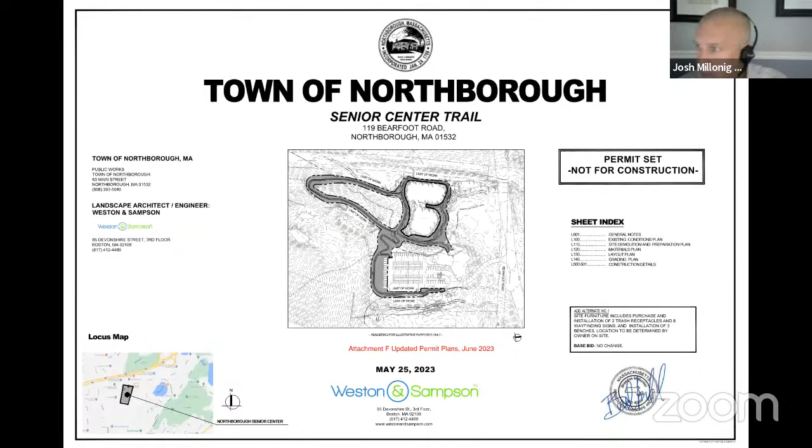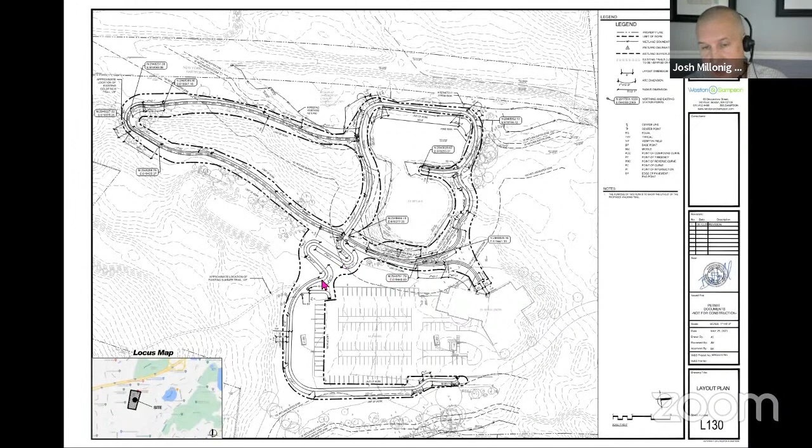This is just our dimensioning plan. A little bit hard to read, but it is a 6 foot wide pathway, and these are all the dimensions that are around there.

The areas of disturbance where we're removing any forest canopy or existing vegetation will be reseeded with a conservation seed mix. Right now, we're looking at a New England wetland plants restoration seed mix. So all disturbed areas will be reseeded and revegetated, and where they're far enough off the pathway, they'll be allowed to naturalize back into typical forest communities.

There'll be a little bit of maintenance that happens along the extreme edges of the pathway, just to keep the path open from being overgrown with any weeds or anything growing over it.

The last few slides are just details of our erosion control measures that we're proposing on the plan to prevent sedimentation from spilling down into the resource areas. So we have a combination of compost filter tubes and jute matting where slopes are steeper than 3 to 1.

We do have a construction entrance, which we're keeping on the existing parking lot area, so machinery and vehicles will be entering from there. Any material storage is also going to be in that same area off of the parking lot. All of these will have erosion control measures around the staging areas. We also have sediment fence and filter fabric with wattles to help with erosion control.

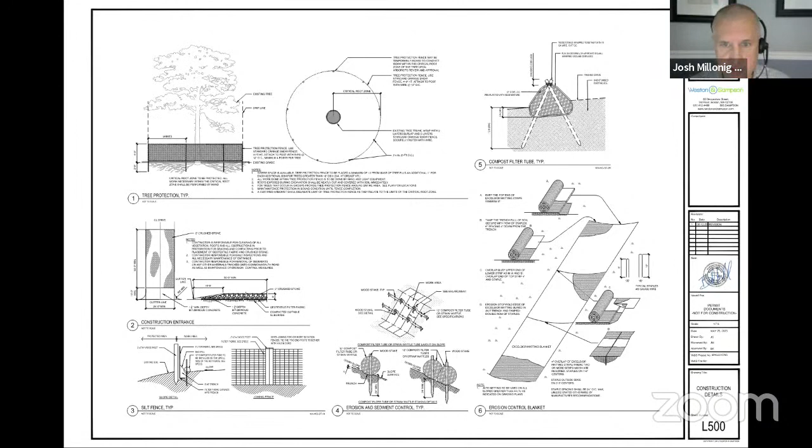The next few slides are just typical details of a small unit block retaining wall to retain slopes where needed, and then typical pavement details. We do have a couple areas of seating, so we'll have a small concrete pad to allow the installation of seating benches along the pathway there.

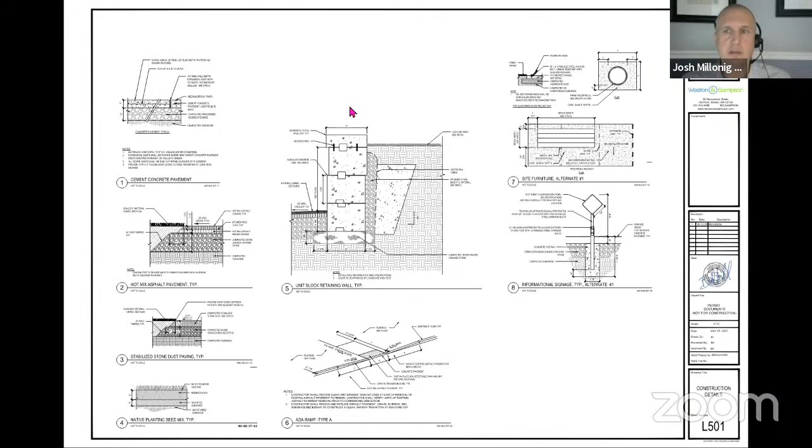Can I jump in and talk about wetland resource areas a little bit, Josh? Great, yes please. Jeanette, if you just want to stay on one of these slides, I can talk to it. You can all hear me all right, right?

I'm Megan Kearns, a wetland scientist with Weston and Sampson, for the record. The proposed work is located within the 100-foot buffer zone to BVW and bank. The bank is a pond bank, which is where the trail mostly goes around, right there in the center of the site.

Technically it's to the west, but it's on top of the page because it's turned a little bit. We've got 2 BVWs north of that and an intermittent stream that runs along the site and goes underneath an existing railroad, a raised bed next to it, and off-site. So all of the work is proposed in the buffer zone, the 100-foot buffer zone, as well as the local 25-foot and 35-foot buffer zones under the Northborough Wetlands Protection Bylaw.

The proposed sidewalk will be in the 35-foot buffer zone, and there will be some grading and vegetation removal in the 25-foot buffer zone. The applicant is requesting a waiver for this work in the 25 and 35-foot buffer zones, as the project does not meet all the performance standards outlined in the Northborough Wetland Bylaw, but it does provide public benefit.

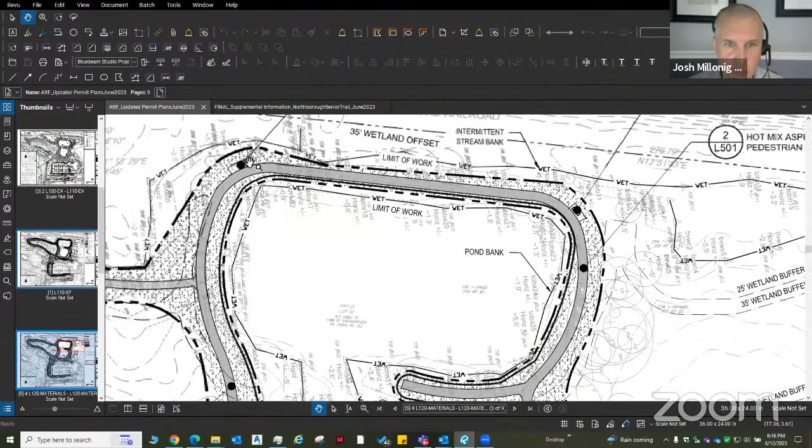Zooming in, there we go. So they're on the far upper left and right bends, more towards the railroad tracks on top of the page. And then there's another one over there next to the existing parking lot. I believe there's just 3 benches, Jeanette, if I'm not mistaken, proposed. That's correct - there's 3 benches proposed.

The Parks and Rec Commission has a donor bench program that's available as well for any future seating areas if they're desired.

So you need some waivers here. Now, we walked the site last week, and we'd walked the site a couple of times previously when we had a previous discussion about a potential Frisbee golf situation in the area. So we're a little bit familiar with the site.

My main concerns are twofold. One, handling that runoff from the impervious surface that's going to go down, and secondly, the north end of the pond here. The water comes up to within less than a foot of the walkway. I think that area back there is a concern of mine in terms of degrading that very fragile environment. I have a photo of that area if I can share my screen.

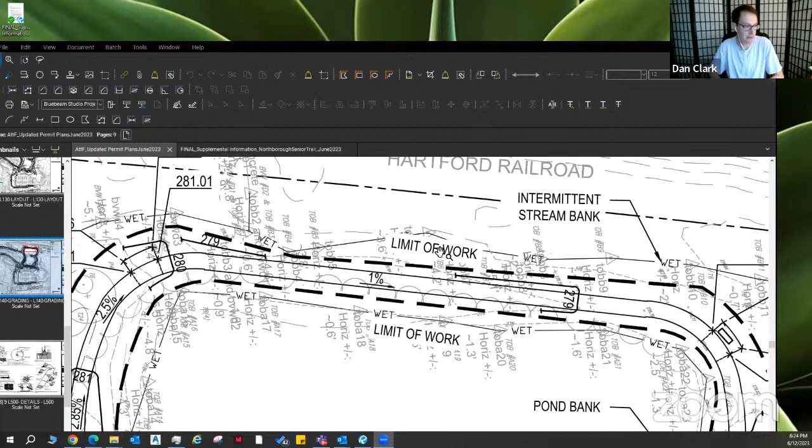Any other commissioners have questions, comments, concerns? I guess I'll go. I have a few questions, but my overarching concern is how much work is being done within those zones, the 25-foot and 35-foot. My concern, I understand it's for the greater public good, but it seems like the town should hold itself to at least the same standard we expect all residents to be held to. We typically are pretty firm on those two setbacks. So I guess I'm not sure how it sounded like the whole project was in at least the 35-foot zone, if not the 25-foot zone. I'm not sure how that settles with me.

Is there any way to just- I've walked that dozens of times. It's actually a very flat, relatively firm path. Is it ADA compliant the way it is? It is not an ADA compliant surface. It needs to be stable underfoot and maintained. There are certain vertical deviations with tolerances that are required.

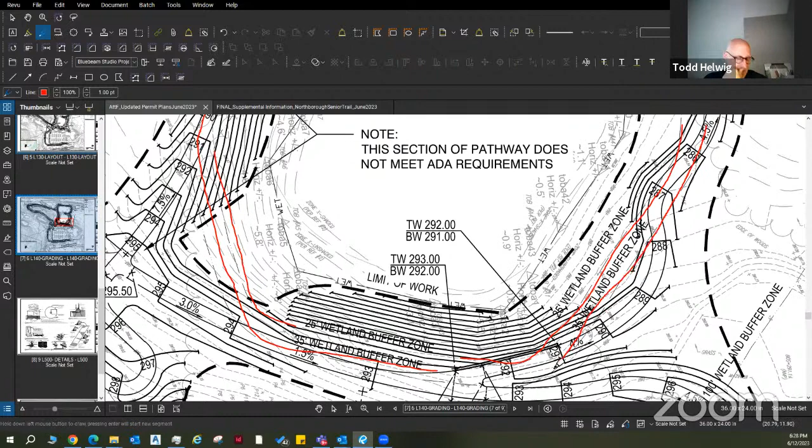If we were allowing a trails committee, just a regular old trail, would we be allowing them to do this? Have we done that recently? My recollection, I can't recall a trail that had this type of... well, we got the stuff down by the Yellick, right? Yeah. Most of it, what's been allowed has been more perpendicular crossings. There have been impacts in the 25 and 35-foot zone, but it's as they're making a crossing as opposed to

moving around it is the idea. And that's what the definition of this project makes it more difficult, because you're not just going through, you're going there to visit. So that's the difference. And that's what the commission can consider when granting the waivers.

I don't know that it's relevant to compare it to our regular trails out on other properties. I think this is site specific, and it's to complement the senior center. And I'm willing to make the waivers for this project so we can go forward. I don't think that we're setting any precedents because we're making an exception for this particular project. And I think we should go forward with it.

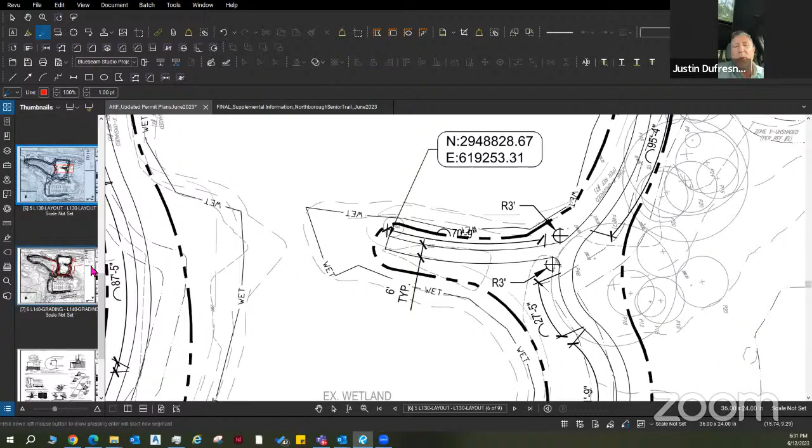Just kind of wondering a couple of things when it comes to impacts. You know, that one sensitive area where we were just looking at in between those two wetlands. Wondering what the minimum width for an ADA path might be, knowing that we're 6 feet there. I mean, could we go to 4 feet through that section just because it is such a tight area, and try to minimize some of the disturbance there? Just kind of a question, I guess, on that front. And then also looking at some of the grading, it seems like we're chasing things down the hill quite a bit towards the wetlands. I mean, is there any way that we could increase a wall by a foot or two and try to limit some of the off grading from the path?

It just looked like in a couple areas we might have a wall already, and maybe we're trying to minimize the height of that wall, but potentially if we extended it a little bit, maybe we could lessen some of the impacts there. And then I guess my third question is just in the routing, there look like maybe a couple areas where if we pulled the routing away from the wetlands a little bit, maybe there's a little bit less disturbance that we could have there. Just kind of thinking of some of those edge conditions, if there's a few ways that we could limit some of the impacts, but still maintain the intent of the design and everything. Just kind of wonder if that's an option.

Yeah, thank you for the questions. Those are great, I'll do my best to answer them in order. So the first one is about the path width. Right now we have a 6 foot wide path. For ADA compliance, you need to provide a turnaround spot for somebody, let's say they're in a wheelchair, of a 60-inch diameter circle, so a 5 foot wide area that you need to be able to turn around. I believe the running widths in between these turnaround zones can be 4 feet wide.

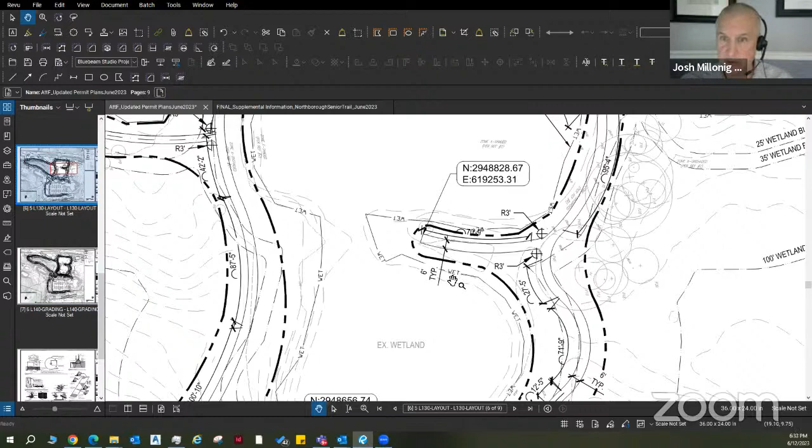So there is a potential in some of these sensitive areas, like maybe in between the two benches that we're talking about up on the north portion of there. I would keep the 6 foot wide area in front of the bench areas to give you your turnaround areas. If somebody went kind of down, they wanted to turn around and come back, they have that ability there. But maybe the connection point, just to minimize the amount of impervious and/or disturbance, we could potentially skinny that section down. So that is an option.

The walls that we have, particularly on that lower portion, kind of closer to the senior center, we're starting to get into a situation where if you have a fall height of over 30 inches, you're required to have a handrail. And also, being an ADA accessible path that's associated with a senior center there, having a lower wall just makes more sense for a safety issue.

It's just in case somebody falls, there's not a larger drop on the bottom side of that. We're also kind of hemmed in a little bit with our running slopes, coming down from that paved patio area up at the senior center. That's their top point, and the math works down at 4.5%.

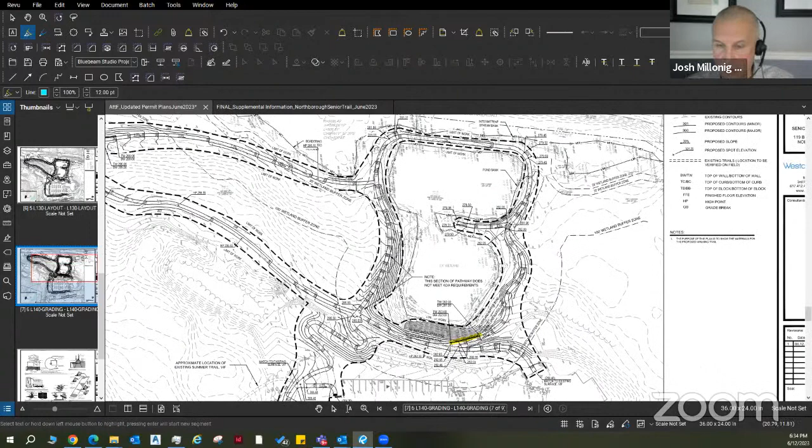In certain areas we're really trying to limit the amount of grading and disturbance coming down to the wetlands. We're a little bit steeper through that area, at about a 2-to-1 slope in those tighter contour lines. Everywhere else we're at a 3-to-1 slope, which is perfectly fine for constructability, maintenance, and general design standards.

A 3-to-1 slope is fairly stable, but the 2-to-1 slope at this particular area we're highlighting in yellow, where the wall is, that's kind of steep. So you could trade it off, but you're just going to get a taller wall. I think, for user safety, having the lowest amount of wall is appropriate in this situation.

And then your final question. Just real quick before we move on, thinking of that area in particular: you have a 4.5% slope coming down, and then somebody makes really a hard turn, call it almost a 90-degree switchback turn there.

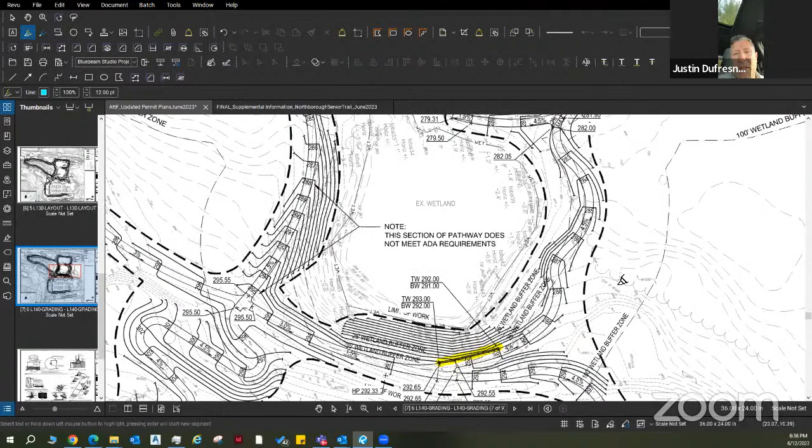And then we have a 2-to-1 slope. So there's not a handrail on that wall or along that edge anyway. I'd be concerned a little bit with a 2-to-1 slope heading to the wetlands, even without the wall there—thinking of somebody pushing a baby carriage, or a senior heading down that slope and then having to make that turn. I almost feel that edge, even if the wall was higher, probably wouldn't be the worst thing from a safety perspective.

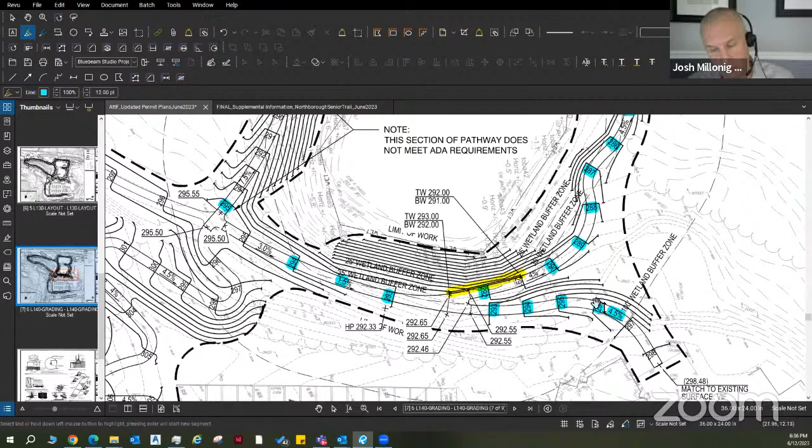We looked a lot into this wall. As you're coming down that 4.5% before you make that hard switchback right-hand turn, it levels off. That whole area is at a 1.5% leveled space, much wider than the 5-foot turning radius needed. So as you come down it gets pretty flat. If you bypass the hard switchback turn and keep going straight, you can see it's 1.5%—once you come down that 4.5% right by the wall, it gets pretty flat as you move to the left. So I don't believe it'll be a hard right-hand turn; making that turn will be on a fairly level area.

Now the retaining wall won't be flush with the pavement there. It will step, so there'll be portions of the wall that act like a curb, sticking up a little bit above the pavement—that's just the nature of the stepping. So there'll be a slight curb area for people in wheelchairs, people pushing strollers, or anyone using walking equipment that older or less able-bodied people might have. It's a kind of curb-like safety feature built into the pathway.

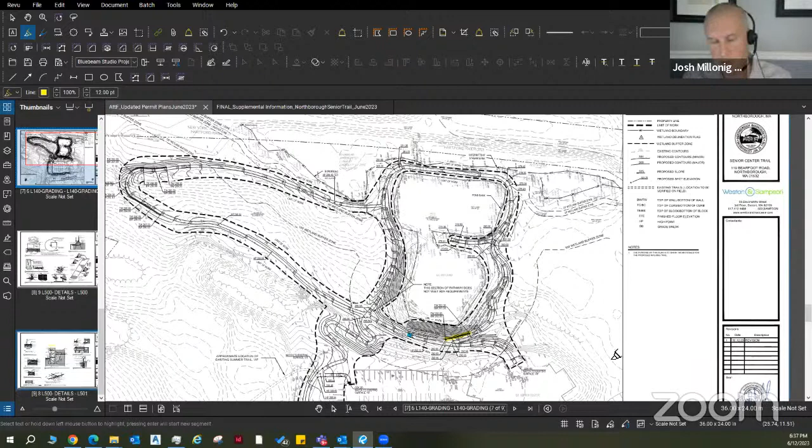Also, as part of our stormwater mitigation, we are cross-sloping as much as we can away from the wetland areas to pitch water towards vegetated areas, allowing more infiltration into the groundwater. So as you're walking down at that particular area with the wall, we're not pitching the pathway towards the top of the wall—it'll be a cross pitch of 1.5% away, which adds a little extra safety for users in that area.

This area will be vegetated. That steep slope will be jute-matted for erosion control, with a restoration seed mix going in there. As that grows up, it'll also act as a bit of a vegetated buffer as well. I hope that answers or sheds a little more light on the overall design of that area.

I can move on to. Yeah, no, thank you. That's helpful. Okay, you all set, Justin?

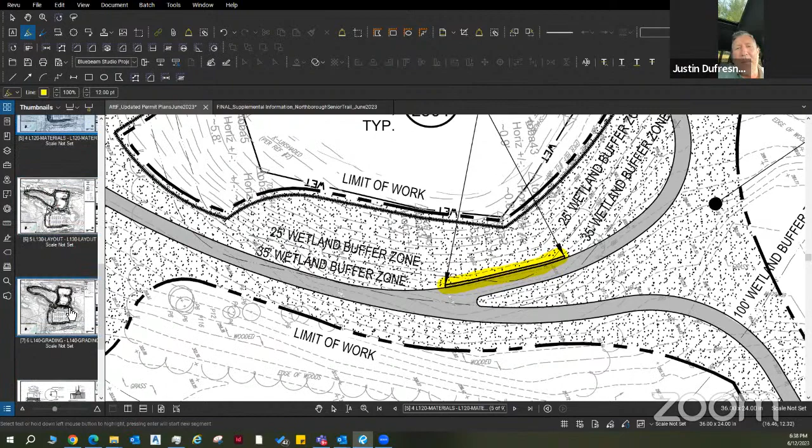I just think with that wall, based on the shots, it looks like it's 1 foot tall. If you could make it 2 or 3 feet tall, doesn't that start to minimize the grade heading down to the wetland? That would be my one thing.

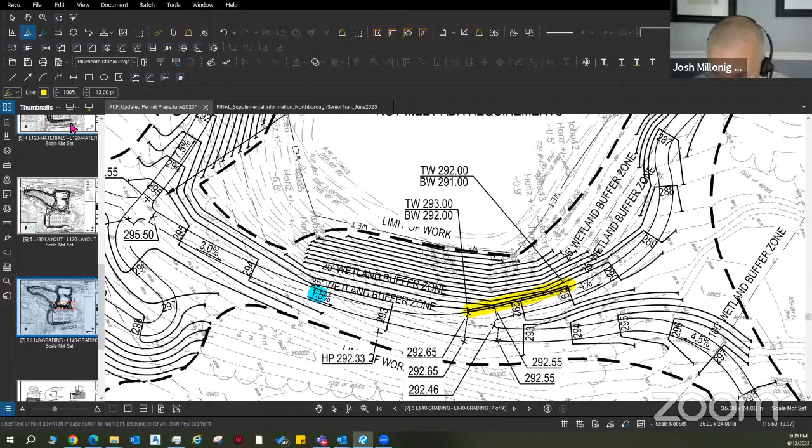Yeah, we can see that wall - I think the 25-foot no-disturb buffer probably zips right along the bottom. It's hard to see, but I've got a bunch of spot contour lines in there. Adding a guardrail or handrail would likely mean more disturbance in that area, since we'd need footings and would need to dig a little deeper.

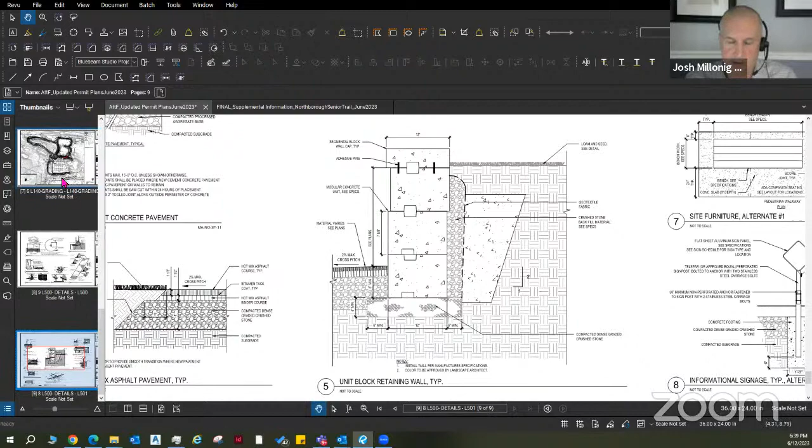The wall we're proposing is a Versalock type of block wall - smaller, man-sized blocks that a laborer can pick up by hand and place. The installation of that style is much lower impact on these sensitive areas. That's part of why we're directing the design this way, really trying to minimize the amount of infrastructure we put in this particular area.

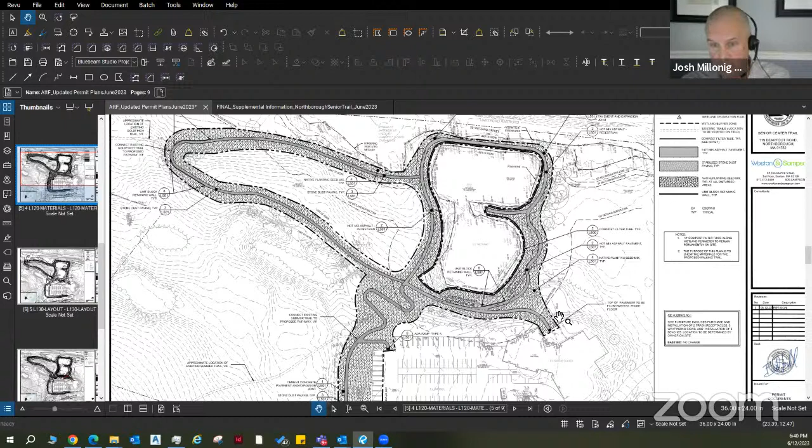More than happy to take a look at it a little more and see if adding a foot to the wall and spreading that out over the other contours would help. I'm not sure exactly how much less steep that slope might be - it might be negligible if we're just lowering another foot to get a 2-foot drop. But I'm happy to look at it further to see if we can come up with an improved solution.

And then I'll jump to your last question, the routing. I believe the one routing is where the stone dust path, on the upper left, potentially T-intersects into the asphalt paved path.

Yeah, that was actually the one area I was probably looking at the most - right where that hand is, and wondering if that was pulled more south, away from that wetland on the top, would we be able to minimize anything there?

We'd have to take a look at it. Right now if we move that path down, I'd have to double check to make sure the grades work. It appears it's feasible that could happen - it's just a matter of where we'd tie in with our grades to make sure it's still compliant.

Wherever we meet at a change of direction, where that stone dust path coming from the left moves toward the right and T-intersects into the asphalt paved path, we need a flat or level 1.5% area for the change in direction. So we need to double check our grades work in that spot to allow turning. But we could revisit that.

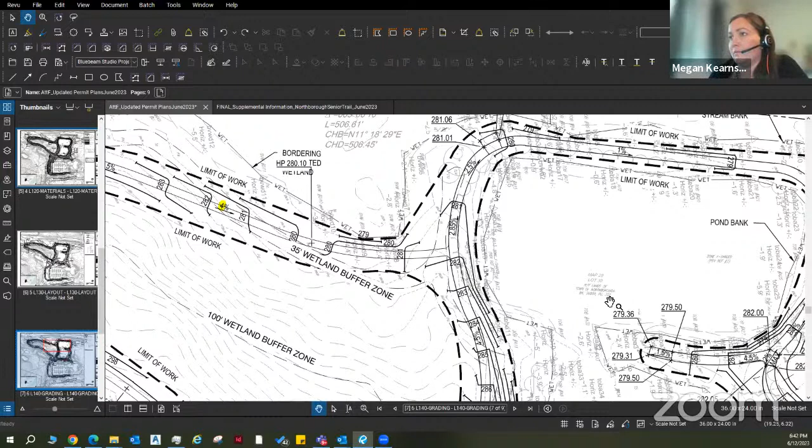I just wanted to add too that we tried to stick to where the existing walkway is as well. There's a limited area where work can occur without clearing more vegetation and trees. Just wanted to add that.

Thanks, man. Very nice. Yeah. Okay, anybody else from the commission have a question? Well, thank you guys, appreciate it. Thanks. Thank you, Justin. So I have a quick...

Is that Tom Beals? Greg, I just have a quick comment. Yeah, 1985, 86...

The upper pond was the only one that was there. When that was the Northborough Gun Club, they dug that second pond, and then all the area where the gravel stone dust path is now - this whole area has been disturbed multiple times. So it's not like it's a virgin site that hasn't been altered by man more than once. Again, I support the project, and I think it needs a few tweaks, but I think we're going in the right direction.

You're breaking up, Tom, but I think we got the gist of your comment. Thank you. Anybody else? Any other questions?

You're talking about grading and cross slope on that path, but when I look at your grading plan, it doesn't show which side. I wasn't sure which way you were directing it to vegetation, and most of your grading on the path is flat. So when you're doing adjustments to the grading, add a little angle to those cross contours. Typically it would be acceptable to put a general note with a few cross slope arrows on the path to indicate which way we'd pitch the pathway. Or are you looking for adjustments on the contours to indicate which side they're pitching towards?

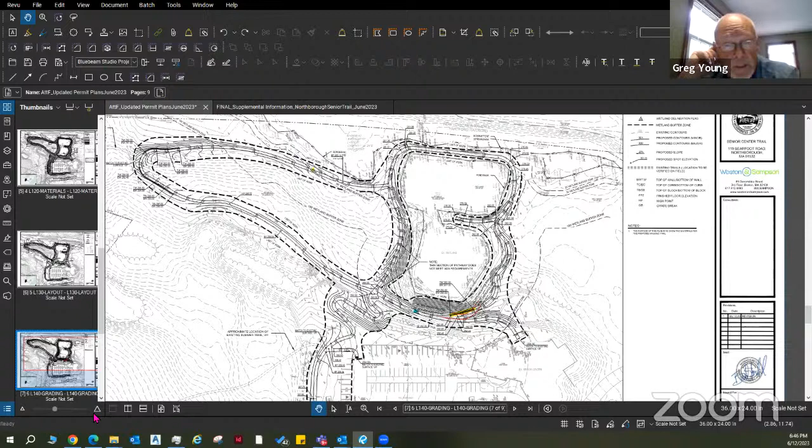Hey Josh, this is Greg Young. My 2 cents is I understand where Dan's coming from in terms of maintaining standards, but I also understand this is a bit of an exception since it's for the public good, and we have some room in the wetlands bylaw to work with, according to Vinnie. From what we've heard so far, I'd like to see you pulling back wherever you can. There's one area Justin mentioned on the west side. I'd also like to see the trail narrowed where you can - you can go 4 feet instead of 6, specifically at the north end, which is right on the edge of the pond. Also Justin should manage the wall height situation, and make sure the erosion control plan is sufficient for that northern, narrow piece.

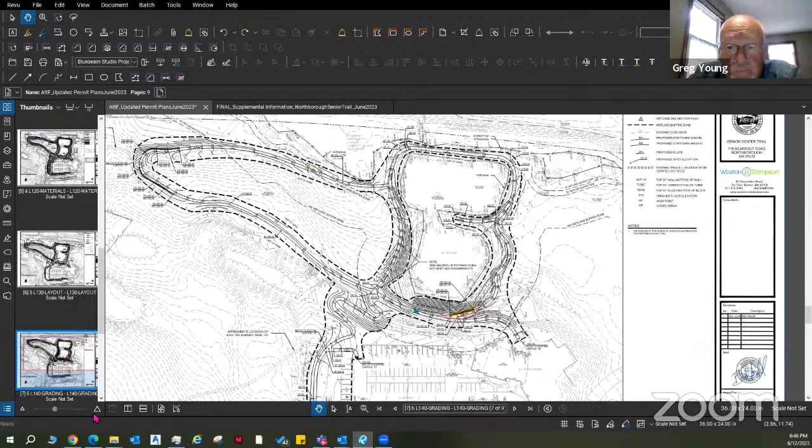Okay. Greg, one final question if you don't mind. How critical is it to the project that the trail circumnavigate the pond? In other words, could you eliminate the section of pond trail that joins that exterior loop trail?

I'd leave that to Scott. Sure, let me jump in. My understanding is the loop trail is part of the overall programming for the senior center - providing a paved loop trail around this wetland area, but then also a more natural stone dust woodland walk, the one that goes off to the left side. I'd defer back to Scott to see if eliminating any sections would still fit the overall project's goals and programming.

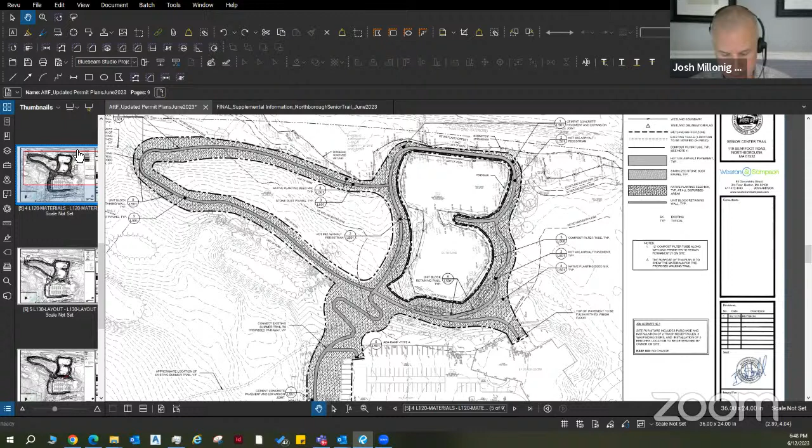As you may or may not be aware, we went through public hearings at the Community Preservation Committee. This was presented at town meeting twice. A substantive change like that, I would want to go back before the CPC to see if it still meets their goals and objectives, since they're the funding entity - that would be my approach. The goal is to provide ADA accessibility around a resource, and this would be just a deadheaded trail that goes out to the peninsula, with the rest being stone dust since it's not accessible. So I'd go back to the CPC to see if they believe the funding is still warranted.

I think the feeling here amongst the commission, certainly from my perspective, is we'd like to make this work if we can mitigate to the extent possible. I think you heard the concerns tonight that folks have on that side.

So Vinny, anything else you want to close with? Before we continue this, I think the comments are there. There are good comments from the commission to add to the ones that I had. Just look at what you're requesting for waivers on and ask for them. The commission is very supportive of the whole idea, and we've been supportive of it for 2 years now. Now it's where the rubber meets the road to make sure the actual design has the least impact possible. Let's move forward and ask for whatever waivers are needed.

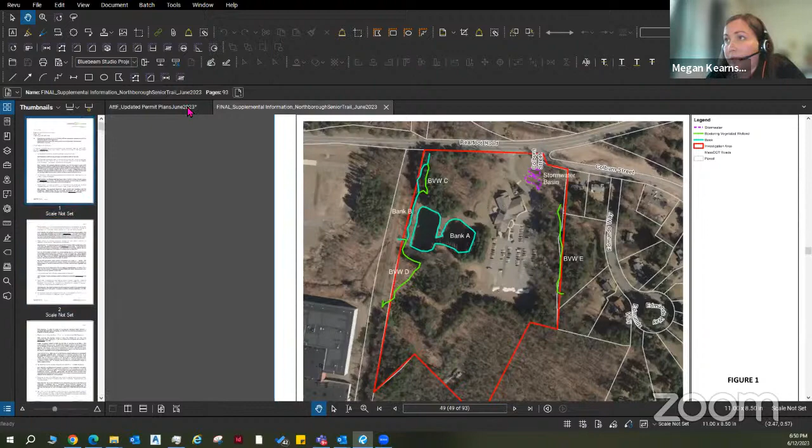Yep, and we did include a consolidated summary list of those exemptions and waivers in our submittal that we just sent over. But we can add a couple comments from this evening to that as well, or send you some more information.

Okay, if there are no more comments from the commission, we are going to continue this to the July meeting, which is July 10th.

We need a motion to continue. So moved, I make a motion to continue. Is there a second? Todd, second? Sure. Roll call vote: Dan Clark, yes. Tom Beals, yes. Diane Gouldner.

All right, we'll come back. Justin, you still with us? Yep. Okay, vote yes, okay thank you. Todd Helwig, I do have to run though, Greg. Okay, thank you for taking the time, Justin, appreciate it. And I vote yes. Dan, did you undo your mute yet? Nope, nope, here we go. You are now unmuted. Okay, and I'm now abstaining.

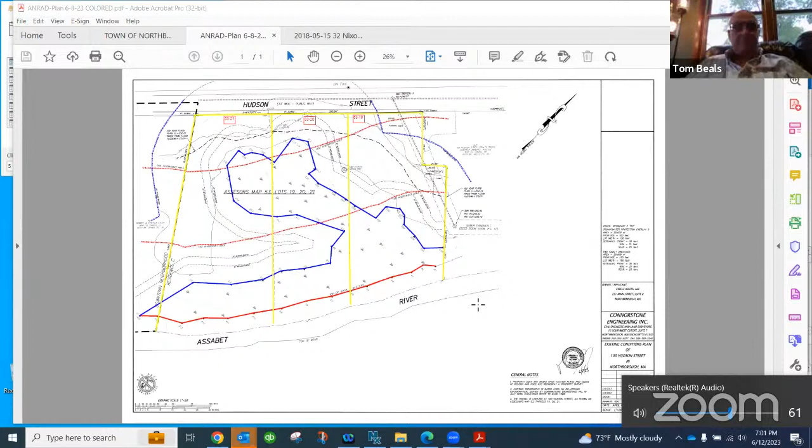So moved. Seconded by Tom Beals. Roll call: Dan Clark, yes. Tom Beals, yeah. Diane Goldner, yes. Todd Helwig, yes. And I vote yes.

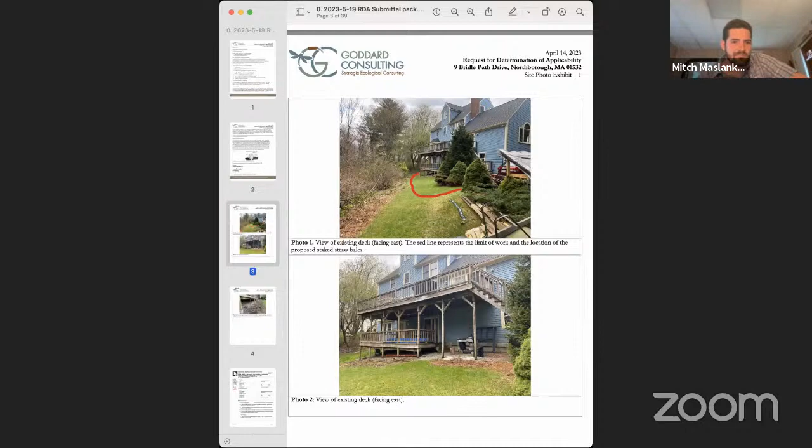Excellent, so what's going on at 9 Bridle Path? I'm here on behalf of the applicant, Tom Linnell, owner of 9 Bridle Path Drive. He's requesting a negative determination to replace his deck in his backyard. It's going to be replaced in the same footprint as the existing deck, so we're just seeking one of those minor exemptions. I'll show you some pictures and plans showing resource areas. Can you guys see that? Yeah, perfect. So this is 9 Bridle Path Drive. The backyard has a double decker deck, with some resource areas nearby. We've got a bordering vegetated wetland. You can see that little blue flag there, pretty close to the deck. We've got another blue flag here.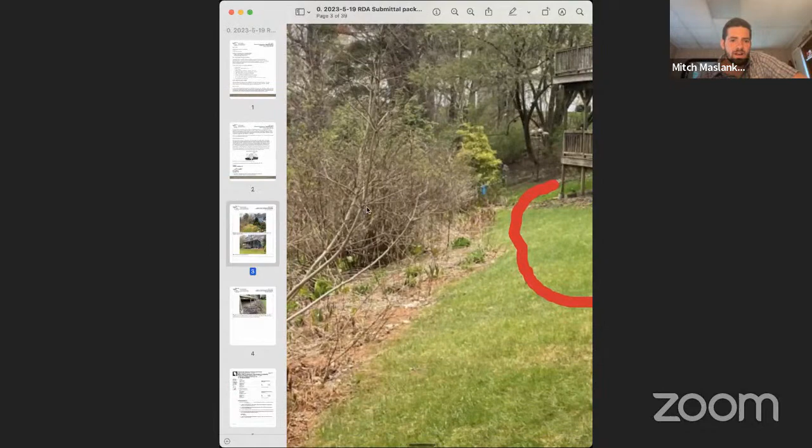So sort of at the toe of the slope is our bordering vegetated wetland. We've also got a perennial river over in these woods back here. On the plan I'll show you how far away we are generally from that. So work is within the buffer zone to bordering vegetated wetlands and within the 200-foot riverfront area. This is the deck they're proposing to replace, and here's a closer up view. So they're just going to replace the deck, bring it up to current building codes.

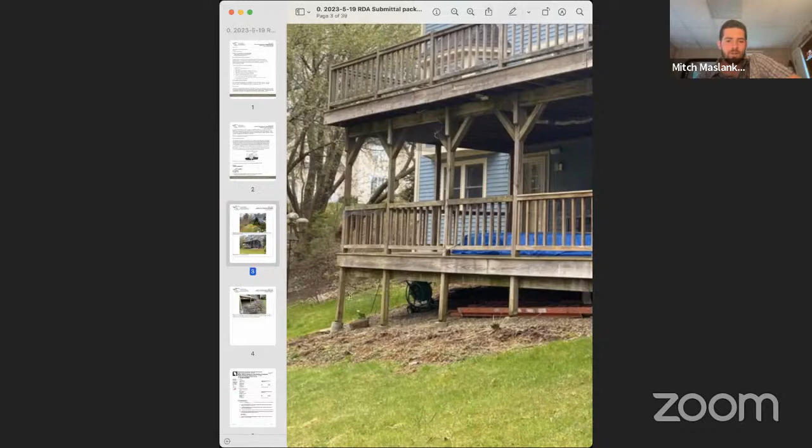Part of bringing it up to building codes is some excavation required just around these pilings. They need to put sonotube around those existing pilings and pour concrete to expand the surface area. Then they're going to put another post attached to these existing posts, just to add stability to that deck. They're going to take a lot of material down and replace it, but the only excavation is to expand the size of those pilings.

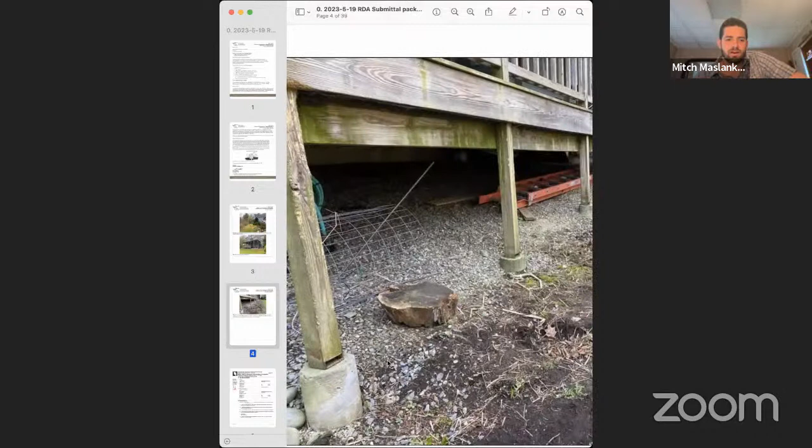So here's another view of the deck. These pilings here will just be slightly enlarged to add another beam to hold up the deck. So I'll show you now some aerial photographs.

Okay, can you see my screen? Switch over to the plan now. Yes, perfect.

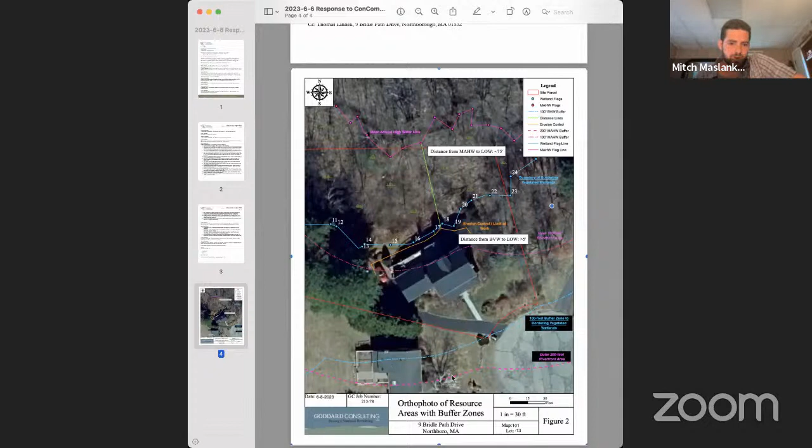And then these other lines, this blue dashed line is our 100-foot buffer zone, so work is entirely within buffer zone. And here's our dashed 200-foot riverfront area line way out here.

Our distance from the bordering vegetated wetlands to the limit of work is about 5 feet, maybe a little closer, but it's just going to be staked straw bales. We're planning not to have silt fence, so no soil disturbance to put in the erosion control. Since there's not much excavation going on, we felt the staked straw bales will be sufficient to keep any sediment within our limit of work.

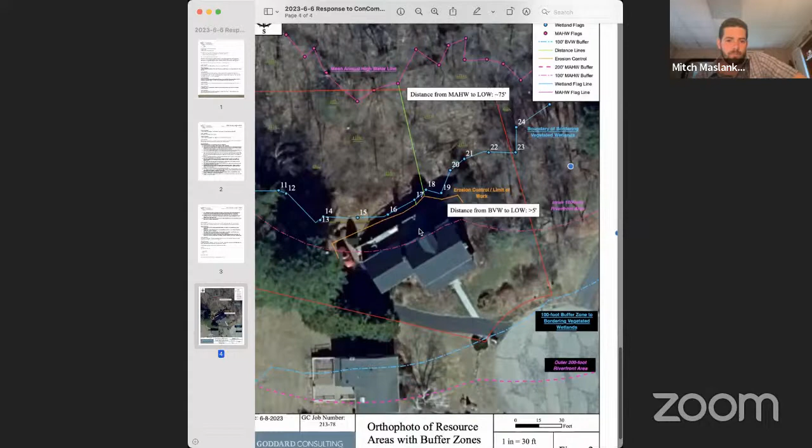So that's the basic plan. Let me know if you guys have any questions. We have some good blueprints of the plans as well, pretty detailed, just basically showing the same footprint as the existing deck. Let me know if you guys have any questions.

You're staying within exactly the same footprint as before, correct? Yes. Actually, hold on, there is one. So there's 2 steps, let me get the blueprint.

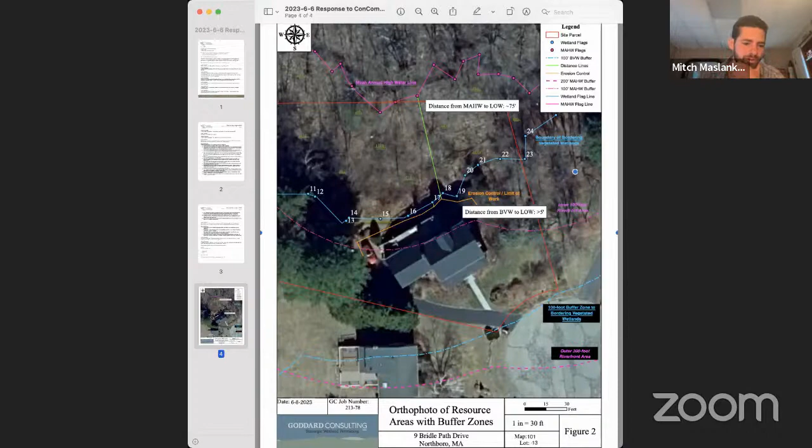And will the work around the sonotubes be hand tools or no machines? That's correct.

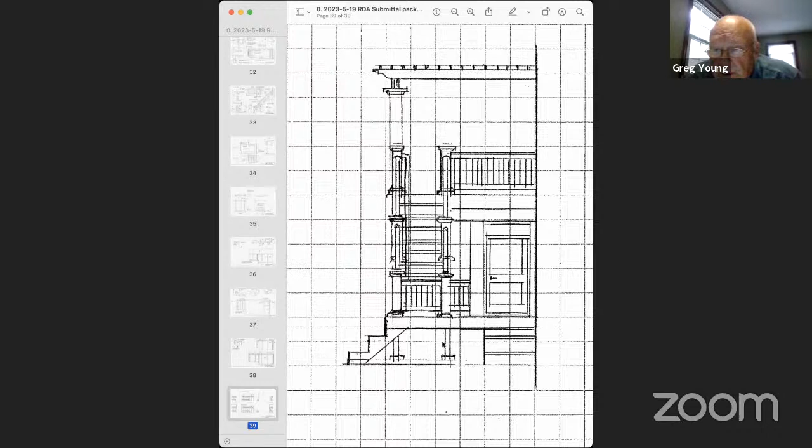Questions from the commission, comments, concerns? I'm okay with this. I don't see any issues with it.

My only comment is that it looks like it doesn't meet even our bylaw. I don't know how that got by, but it's been there for 40 years, so it predated our bylaw. Been that long? That's what I saw in the plan, yeah.

40 years isn't that long ago, Tom. Yeah, okay. All right, any other comments? Looks fine to me. Okay, thanks, Dan.

Any concerns? All right, no concerns. So we're looking then to, we have to close the hearing still, Vinny, or is this an exception?

To close it? We can close the hearing. This is an ANRAD, I'm sorry, it's a request for determination. Yep, so it doesn't need a DEP file number. Okay, all right, so we'll vote to close the hearing for the, oh wait a minute, RDA for 9 Bridle Path. No, I'm sorry, requests for determinations do require.

I think you gotta check that out. Do you know that off the top of your head, Mitch? Maybe just to be safe, close the meeting, the public meeting, because it's not a hearing, it's a meeting. So maybe vote to close the meeting and issue a negative determination.

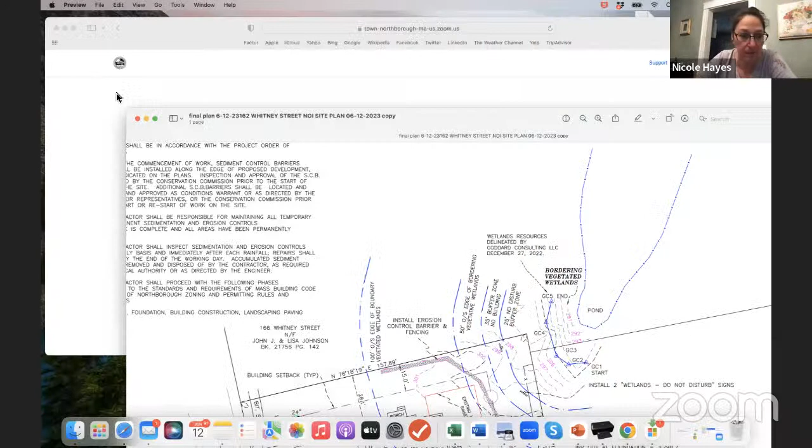Desktop share, can you see that? Yep, yes. Okay, there you go.

Good, this is the pond and the BVW located off-site, right in here. 25-foot no disturb, which we will not disturb. 35-foot no building, there will be no building. A 50-foot vegetation preservation area that will be maintained. This is the old house that burnt down that will be razed. The new house will be in this area. And this is the 100-foot buffer zone line.

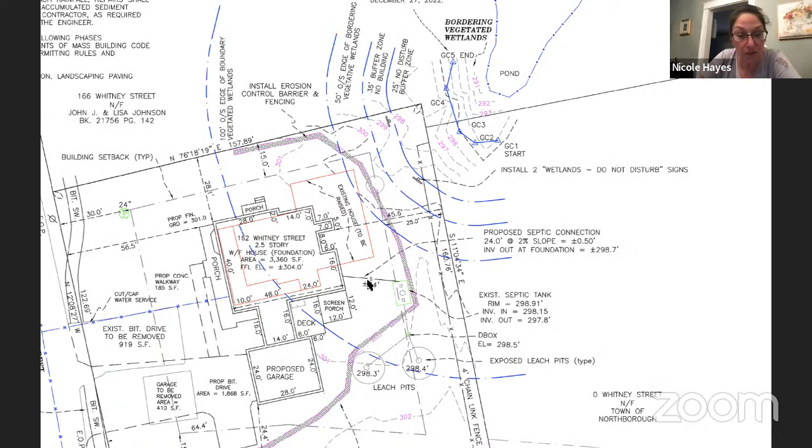So work within the 100-foot buffer, within the 50 to 100-foot buffer, is grading most of the house, a screened porch, and part of a deck. Erosion controls will be placed at the limit of work to protect down-gradient resource areas. And if you have any questions, I'd be happy to answer.

Well, good news is it's further away from the resource areas. Yeah, that gets a lot of points. Any questions from the commission? And just to add to what she has, she's putting in two signs for wetlands, do not disturb. You want to point to those at the 25-foot, just outside the 25-foot area? Right here.

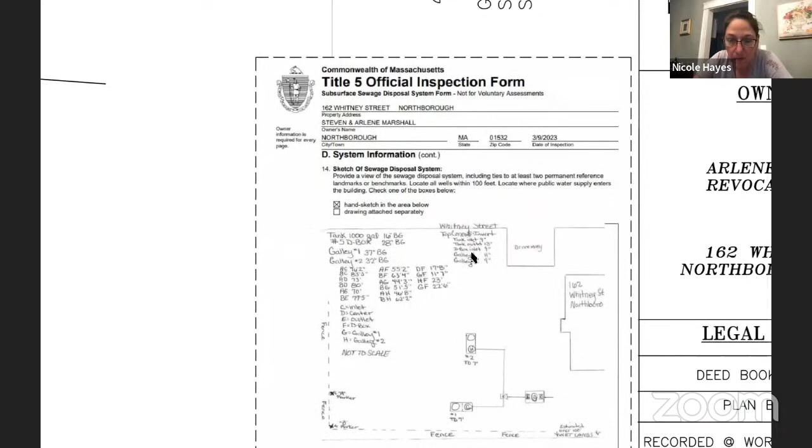Are you reusing the septic system? I'm not exactly sure about that. They do have the Title 5 inspection form on the plan. I thought they were doing something different. There's some leach pits right here. Yeah, I think that's the existing one. I think they located it, they did an inspection, I think it passed Title 5. So they're just going to tie in. They've got a new connection to the system, a proposed septic connection shown there.

Okay, and so that's what the work is now, closing it with the erosion control line going around that. And I think all they're doing is connecting to the septic. Okay.

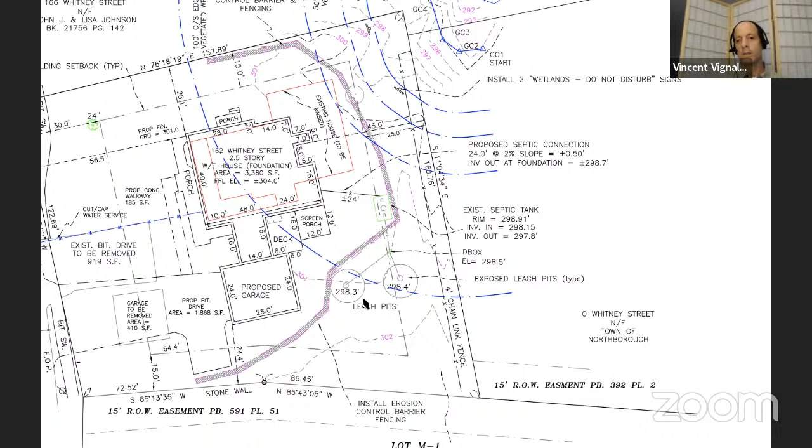I guess the Board of Health has already bought off on the plan on that piece. I think they've reviewed it and signed off. You okay, Dan? Yeah, I just wondered where it was in relation to the wetland.

Any other questions or comments from the commission? Okay, I see a hand up. I'm going to bring in Steve and Arlene Marshall, they have their hand up. Oh, those are the owners. Well, let's bring them in.

Any second? Do I need to stop sharing for you to let them in? No, they should be coming in, you can keep it up for now. Are you here? Hey, Owen, did I drop them by mistake? Unmute, hi, can you hear us? There you go. Yep, thank you.

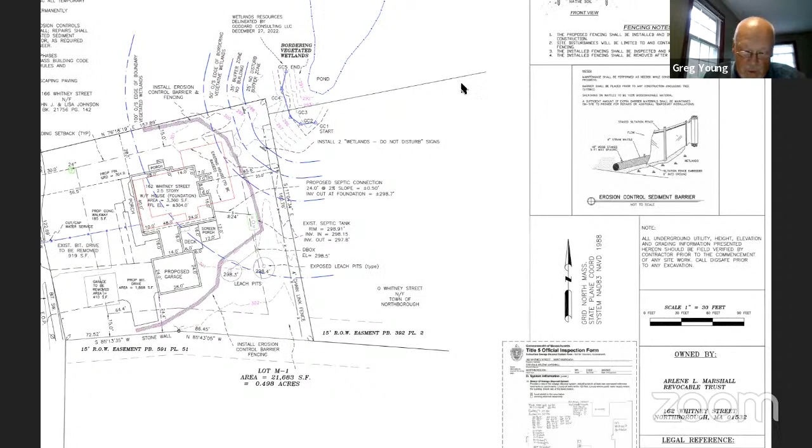All right, hopefully July 10th will be a very quick approval. But does that mean we still cannot have demolition? I can check with the building inspector to see if that's a possibility. I'm not sure what his requirements are to issue a demolition permit, but I can talk with the building inspector.

Okay, thank you. Thank you, folks. All right, thank you very much. Thanks, Nicole. All right.

I believe we are going to 0 Bartlett Street, stormwater management and land disturbance. I know I saw some folks there. Okay, they're bringing in David Robinson.

Yes. Scott Weiss. All right, that's all we have for hands. I think that's all. Yep. Is there a Scott Weiss? He's also coming in, oh perfect. Yes, in fact he's here, I believe, with no sound. There he is. Okay, Scott's with us and David's here, right? I'm here. Okay, good evening, good evening.

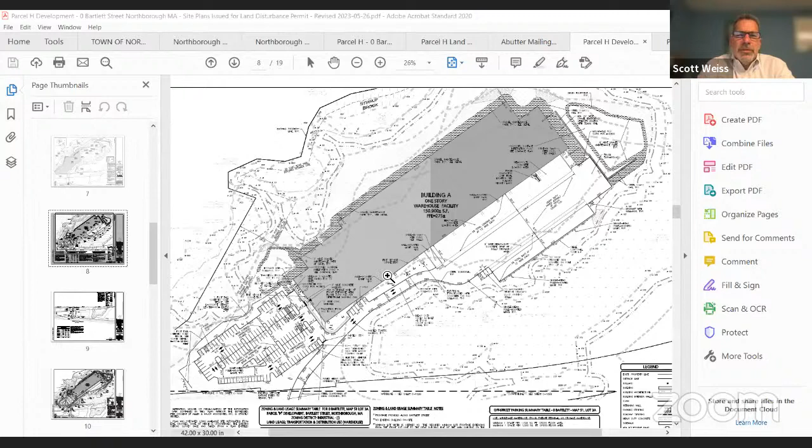We have 2 detention ponds, detention and infiltration. Is that correct, David? It's just infiltration. So any water that goes in there drains down into the ground and recharges those surrounding wetlands. Right, and they also hold water, right? They hold back water. Right, exactly. And so we do have those two basins, and those are sized based on the DEP numbers that are in place currently, not to the higher numbers.

And so what happens is with these different numbers at a higher storm level, they're about the same for the storms you analyze - what is it, 2, 10, 25, and 100-year storms? Correct. And it matches up pretty well in all of those storms, except for the 100-year storm. There could be the potential for some additional water to use the spillway over the top, which would then feed directly into the wetlands and the stream Stirrup Brook off the back, which is at a lower elevation than pretty much everything in the surrounding area.

What about the other one, the trunk line, or are they the same? Oh, so that is just a plan item that I don't know where the requirement comes from. Then you can maybe comment on that, but it's usually a way to check for conflicts, that we don't have pipes crossing each other.

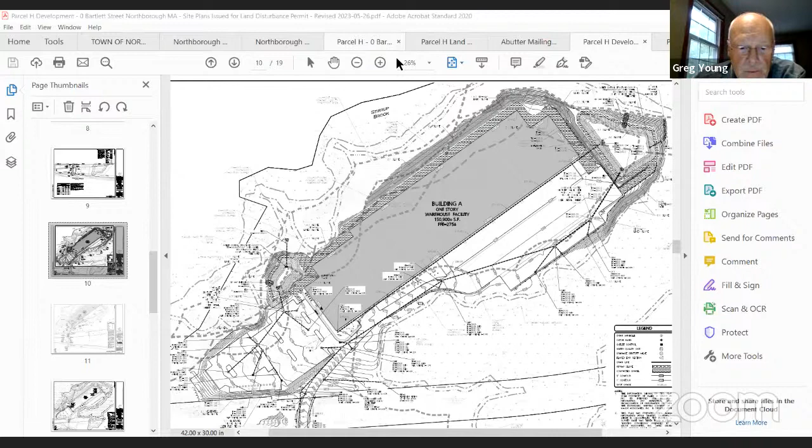Nope. Since this is a land disturbance hearing, do you want to pull up the phasing, the erosion control plan? It was well done. It just shows the areas where they've got control in place, temporary berms to contain construction site water before they even start doing the work on the basins.

And those are sized to hold the required amount of runoff from whatever area has been altered that's upstream of it. So I think they've done a pretty good job with this, and I'm hoping that we won't have any issues with it. I don't anticipate any.

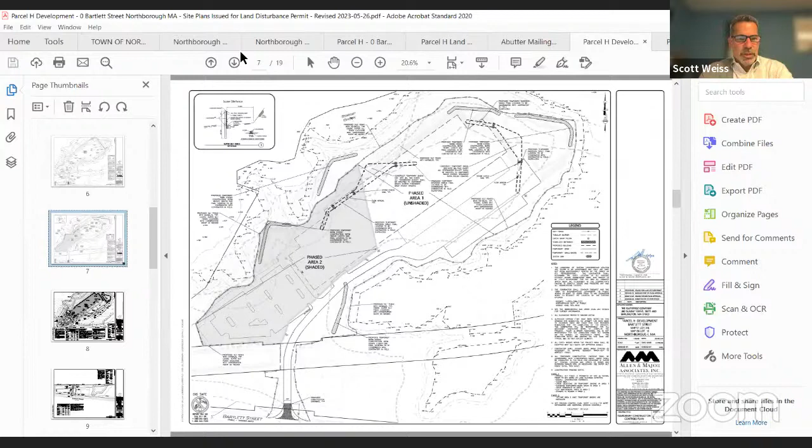There was soil testing done for those infiltration basins, and it showed good sandy gravel. That's correct. Very good.

So no, I don't see any questions from the commission or concerns. Vinny, you seem to be good with what's been done here. It looks like it's pretty comprehensive to me. Yes, very well done.

So we need a motion to close the hearing on Zero Bartlett. I make a motion to close the hearing for 0 Bartlett Street as it is on the agenda. Second. Seconded by, was that Todd? Todd, very good.

Roll call. Dan Clark, yes. Tom Beals, yes. Diane Gouldner, if you're not muted—I can't see. Let me see here, Diane. Diane is asking to unmute. Diane, you're muted. Try the space bar, it might work. Okay, here we go, you're good. Yes, very good. Thanks, Diane. Todd Helwig, yes. And I vote yes.

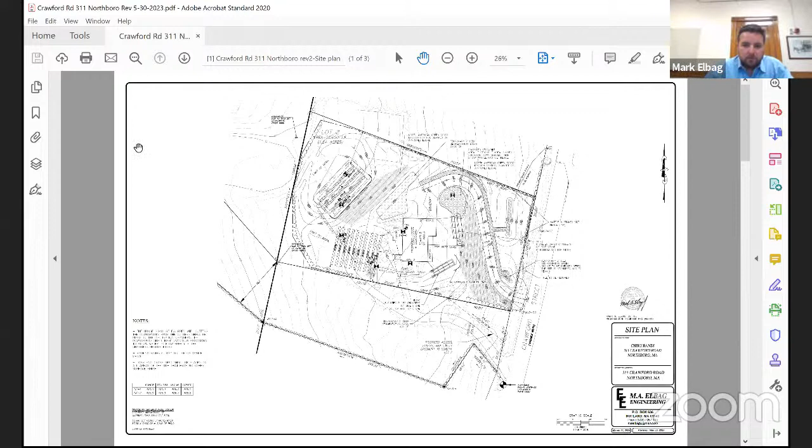Certainly, so here's the plan. Can everyone see that okay? Yes, it's a little bit small, but yes. Let me zoom in here for you. How's that? That's pretty good. A bit of a mix, a little small, but you can see the whole lot.

This is relatively similar to what was discussed at last meeting, with the biggest revision being the stormwater device in the northeastern corner of the lot. We were previously going to leave that undisturbed, but we decided it's probably worth the trade-off to get whatever stormwater mitigation we can on the lot. So we've added that swale for infiltration and a little bit of detention. As you may be aware, the water on the lot runs down to Crawford Road—it's a very steep existing lot now.

So we've worked to do everything we can to slow this water down and treat it. All the roof runoff is going to go to these infiltration units. They're oversized because we're not only using them for infiltration, but also for detention. And then the driveway water is going to go to this water quality, or armored riprap, swale. We're picking it up about halfway down to treat as much as we possibly can before it gets to that bottom section of the driveway, which is largely a cut into the hillside.

So we're matching and mitigating peak runoff flow for the proposed development, matching the pre-development flow rates and discharge locations or flow paths, if you will.

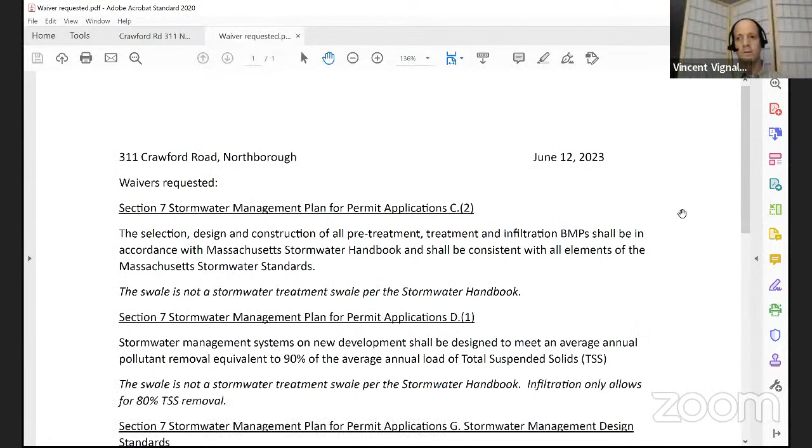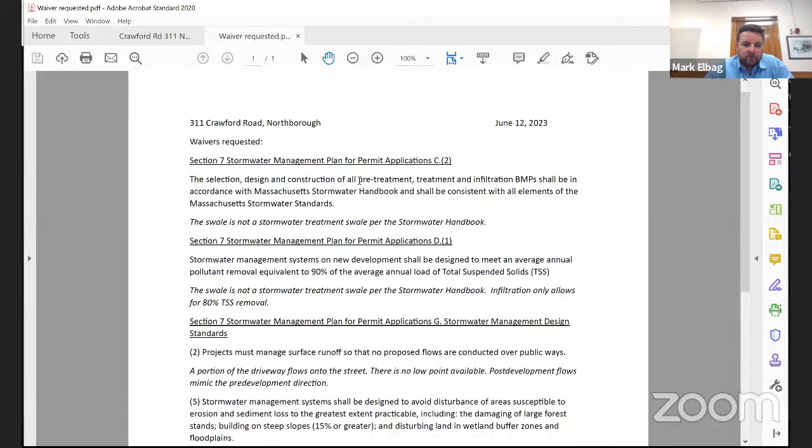These are the waivers requested, and we did it by section, so that it was laid out exactly what we're asking for here. This first one is Section 7. The first few are all the town regulations, or bylaws, I should say.

In this we note that the stormwater swale is not a true stormwater treatment swale because it does not meet the design criteria from the stormwater handbook. Because of the slopes here, it is impossible to actually have a treatment swale along the driveway that would meet appropriate grades to be considered a treatment swale.

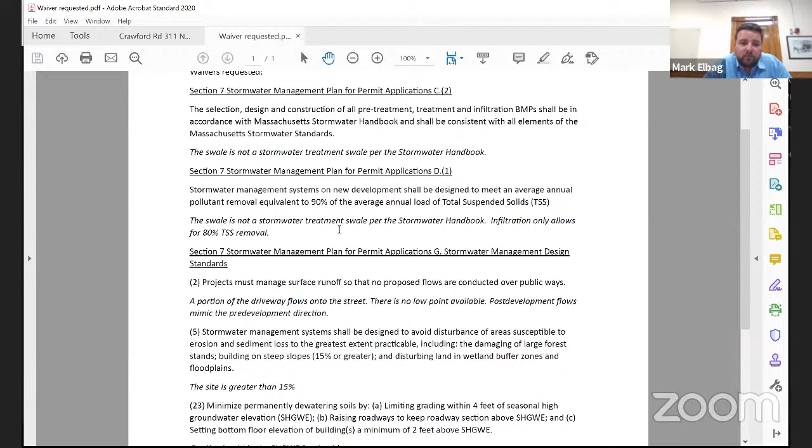Next is, in layman's terms, a requirement to reduce total suspended solids, or to reduce 90% thereof. In this case, we are doing as much as we possibly can to treat the stormwater. We're not only infiltrating, but we're detaining the roof water, and we're treating the driveway water with that driveway riprap swale with filter fabric, which then goes to infiltration basins. Whether they're considered infiltration basins or, if there's water at the bottom, a wet basin, both of these devices alone account for 80% TSS removal. So we may not be reaching the full 90, but we're doing everything we can and getting relatively close to that standard.

Next, it gets into some of the driveway layout. This first one is a requirement that the driveway cannot be graded in such a way that it puts water onto the street. In this case, it is physically impossible to not have the driveway grade into the street, so we are asking for that waiver there. There is no low point in the shoulder where we could redirect water before it reaches the street. This shoulder on Crawford Road in this location is straight up the hill. There is no roadside swale or drainage that we could tie into and direct the water.

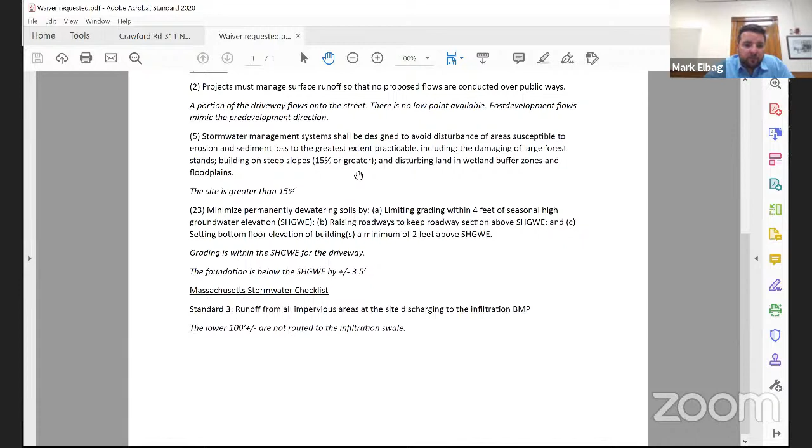Next relates to 15% slopes or greater, and in this case the entire site, or largely the entire site, is greater than 15%. So we are seeking a waiver for clearing or disturbing land greater than 15%.

Now we're down to, sorry, reading this quickly, about seasonal high groundwater. The driveway entrance is a cut, as Vinnie noted, so we are likely into seasonal high groundwater there. Seasonal high groundwater in this glacial till material is between 36 and 48 inches — it was actually a little deeper, between 40 and 48 inches, on the site. So we are going to get into that water table that is seasonal, and it's physically impossible to stay above that while still constructing a driveway.

And lastly, from the Massachusetts Stormwater Handbook, Standard 3 relates to impervious area and infiltrating all impervious area. We're infiltrating as much as we can, and we're actually infiltrating more than needed for the roof area. But the lower section of the driveway is not truly getting infiltrated, so we're asking for a waiver there. I apologize, I went through those rather quickly, but I'll certainly take questions or discuss any or all of these in more detail if you'd like.

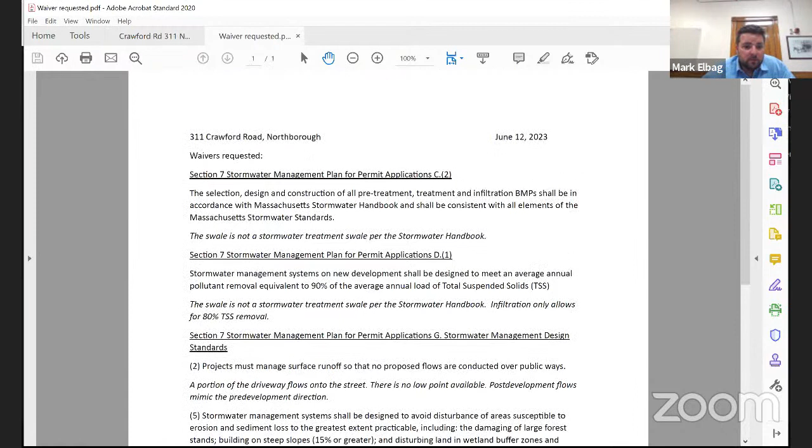So I'm just going to throw this out there. I suspect I'm not the only one thinking that, but given the number of waivers, perhaps this lot just isn't buildable. I had the exact same thought, Todd. But why would we grant all these waivers? I don't understand.

Well, it's a tricky legal procedure, I'm not an attorney, but it is somewhat allowed by right, by zoning. I don't know the answer to that. I'm not going to play attorney tonight. I'm just an engineer, so I'm engineering the best possible solution that I can, and that's what I've presented to the commission.

I'm not seeing any upside to doing this. It's like a lot of problems in the future, if you ask me. And we've had these problems, all of them before. I mean, if you're looking for one waiver, that's something, but you got a page and a half of them. Yeah, I'm not inclined to grant them. That's my opinion.

I would say rather than deny, if that's the intent of the board, that perhaps it gets run by town counsel just to see how this denial would be handled when this is allowed by right.

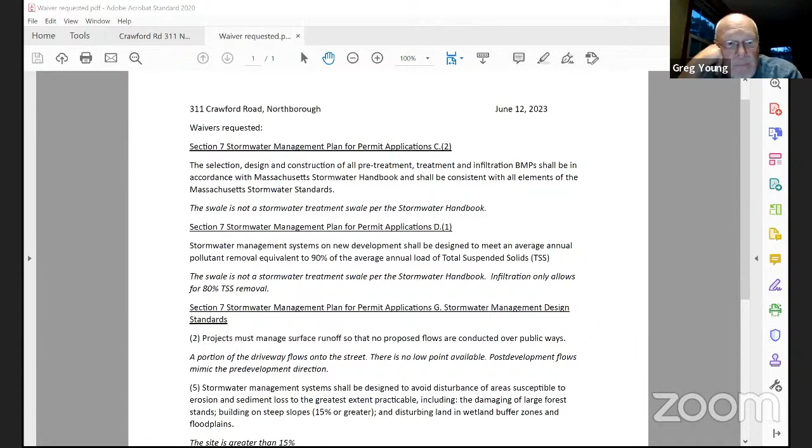Go ahead, Todd. I was going to say we would be welcome to hear what he or she had to say. Yeah, I'm sorry, there's not a better answer, but engineering wise, there's really no more I can do.

Believe me, I'm not saying that to be negative. I'm open to suggestions here if anyone has any ideas. So what about- go ahead, Tom.

What about a trench drain at the end of the driveway with a reinjection gallery at the end of the driveway? You're just going to have to make a bigger cut.

We could certainly look at that. There's just nowhere to outlet the- there's nowhere to outlet it.

I understand that, but if you have minimal retention spots that you have, it's just going to be either groundwater bleed out or surface runoff on the last 40 feet of the driveway.

I don't know what the soil conditions are at 9 feet down from there, but it might be an alternative to stop the water from going onto Crawford Road. Again, you would have to make a bigger cut for some sort of injection gallery there. But what if you're 20 or 30 feet out of that bank, making enough room to have a retention area for just that end of the driveway? That's my thought.

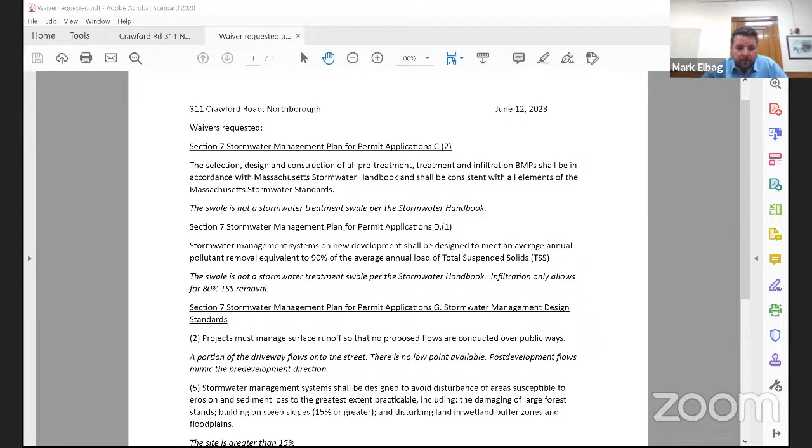Yeah, we could look at that, if I bring up the plan again. I do have a retention area down at the bottom. Even that retention area is in a big cut, but we could make that larger.

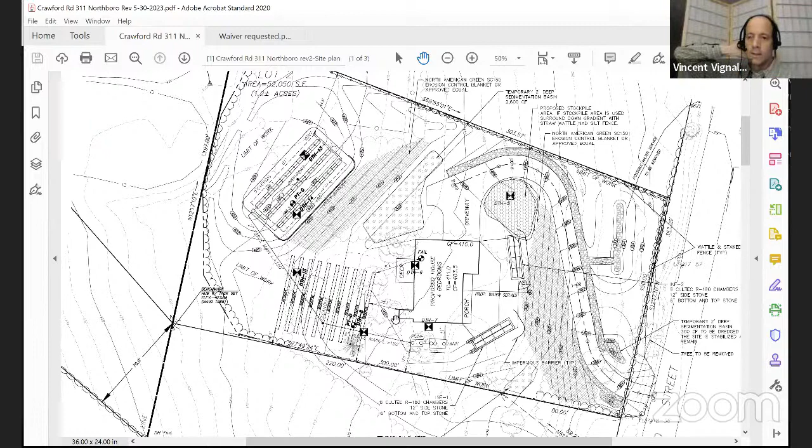Maybe we can look—I kept it a few feet above road grade so it would work a little better, but we could look at lowering it and making it bigger. Right now the bottom of it's at 384 and the street elevation is somewhere around 382 right there.

Can you folks still see the screen? Yeah. Yes. Yeah. Yes. Yep.

So my suggestion would be to make like a 40 or 50-foot cut right there and move that down to the edge of the street, and put a trench drain right across the driveway so that you don't have any runoff to the street. It's more excavation, but if you want to develop the property, you're going to have a huge excavation as it is—what's another 200 yards?

So you're thinking of almost creating the drainage gutter along the street that would normally be there? The downside is it wouldn't drain, but at least one frontage would have the roadside swale. Is that kind of where you're going?

No, I think he's talking about a French drain, an underground French drain along that shoulder. Well, off the shoulder, but that's work within the right of way, which we haven't—no, I don't know if we can do that. I'm saying you do it on site.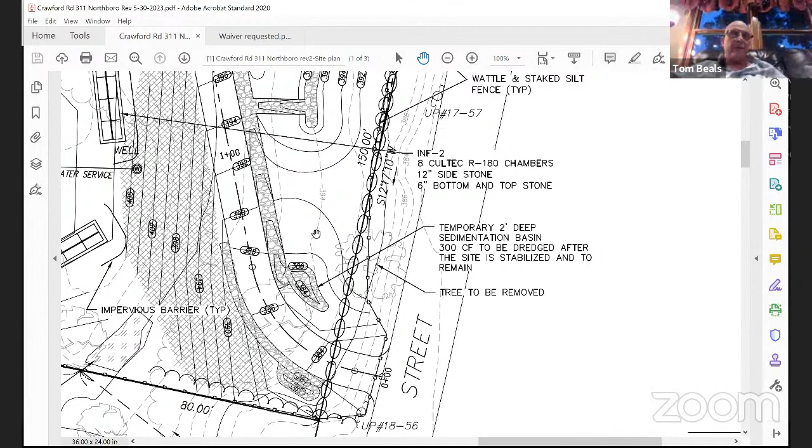You stop any of the groundwater runoff that's going to come out into the street. But I guess there's two options. I could run it - understand the soils. If I run it in the street, it would be in the right of way, but we could create the roadside swale gutter there. If I went to the back of the wall to do it on property, we could run it along the back side of the wall. But the wall is 8 or even 10 feet higher than the road, so there's no way I'm going to get the last part of that driveway to drain into it.

Right. I don't think you're going to be able to get the whole driveway, but if you can get from your property line over, that's the improvement we're looking for, because that's going to take whatever would be weeping out.

But your proposed elevation on the driveway is 384, and just up from that in the drawing it looks like 394, so it's like 384 to 394. You're already in a serious cut. If you look at the plan, the flow that's not going to enter this small basin is from halfway between the 386 and 388 contour. So we're really only talking about a small section of driveway that's not already entering a treatment device - it's not a long length.

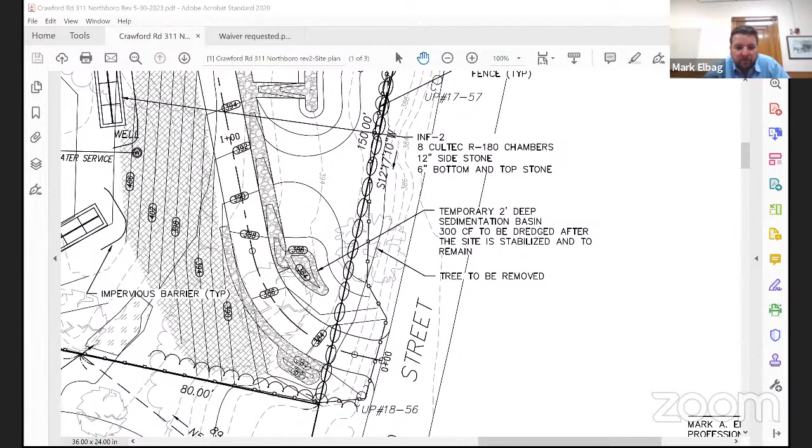So hi, I'm Fernando Yankee. I'm the builder that the Chiru and Maggie have hired to build this house.

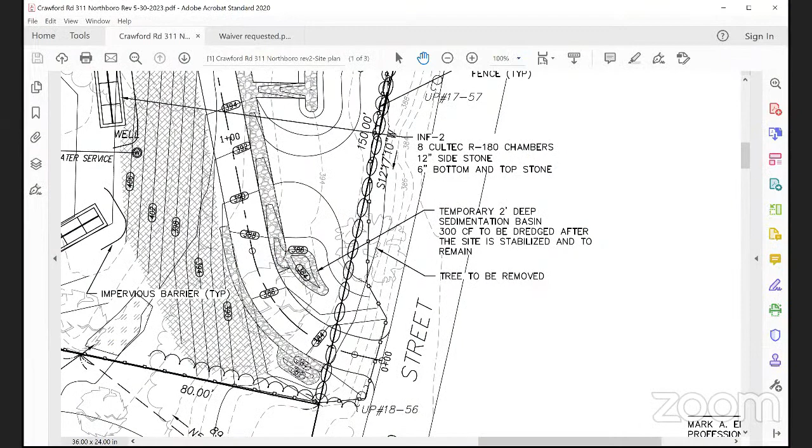Let me just say something - maybe we missed some piece of information. This lot used to be one large lot, and someone split it into 4. If you move the screen a little bit to see where the house location is - we used to have a house over there, and we demoed it to build the new house. You can see we used to have this driveway that is now in a neighbor's property, and to access this property where the house is now, we used to have a house in pretty much the same position. The back of that house is now the front of our house, so our house is now maybe 40 feet toward the back side of the lot, and that's kind of what you have.

And then when you guys were asking about the driveway permit - we applied for the driveway permit, got it, and the slope we had was pretty much this one.

So that's the driveway permit we had before, 311 Crawford. The drawing used to do that was this one. As you can see, Mark pretty much got the same driveway we had. I think we just put more stormwater management devices over here, and the location of the other house used to be right over here. So now we move this where the house is towards the back here, to get a better slope in the driveway, to access the garage.

Now, as Mark was saying, we're trying to do our best with the site here. The customer purchased this property a long time ago, and I think he spent like $300,000 for the lot. We demoed the house that we had here, and we put the well in place here. So now it's kind of hard for us — I'm only the builder, but maybe the owner would like to say something. If you say this lot's not buildable, that will be very, very bad. I think he's already spent close to $350,000 on the development of the site.

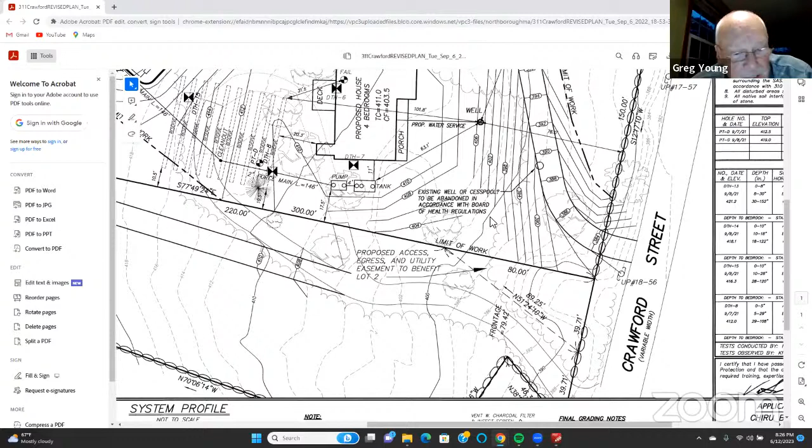I have a quick question. Once the engineer has done all the changes, and once again all the exceptions are there, it's still the same. So will that be a yes or no during that time? Because I think we have like 6 or 7 exceptions, waiver forms, now. I think maybe after a month there may be the same thing going on, maybe like 6 or 7. What will be the case in that time? Because we spent almost 350K, and we are almost spending more. So just want to make sure of that.

So I'll be straight with you right now. I don't see a way that you're going to get this vote from me unless you make substantial changes on the waiver list. The fact that you bought the property without knowing the answer to these questions, while upsetting and not good, isn't the commission's issue.

Yes, but as far as we are aware, when the property was sold, there was never a question of the stormwater permit. After we started applying for the building permit, that's when this thing came up. So we are not even sure how the lot was divided and how it was allowed to be sold without the stormwater thing done on the property before. That's kind of surprising for us, because this is what we are dealing with now, but it wasn't part of this before, right?

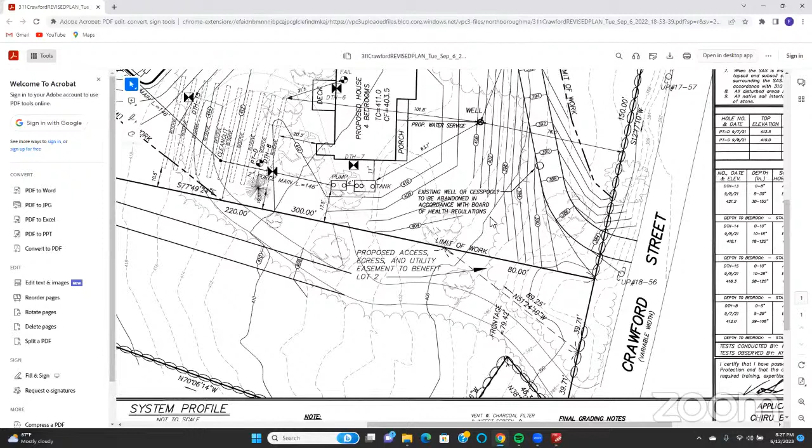Talk to your attorney. I'm with Todd. I think it's an unfortunate situation, but I agree with Todd. Unless that list can change, I can't support the project.

Okay, we had a motion to continue. Would it be acceptable to hear opinions of any of the other commissioners, or is that not acceptable at this time? Would that be too much like a vote?

Well, I tell you, my opinion is pretty much what you've heard from the existing commissioners. I'd like to see that list brought way down. Thank you, I think you can make that work. You just gotta do a little bit more to get that entranceway changed. I think it's doable, but it's just gonna require a little more effort at the entrance, in my opinion. And then I would be okay with the other waivers.

All right, we have a motion to continue. I believe we have a second, and we've started the vote, and I believe we got as far as Dan Clark, correct? Yes. Tom Beals, Yes. Diane Gouldner, Yes. Todd Helwig, Yes. I vote yes. We are continued until July 10th.

Thank you, folks. Thank you. You know Vinny's number, so Vinny's your guy you want to talk to pretty soon. My new best friend, Vinny. New best friend, Vinny. My cousin, Vinny. There you go. Okay, very good. All right, thank you, we'll see you later. Thank you, Mark.

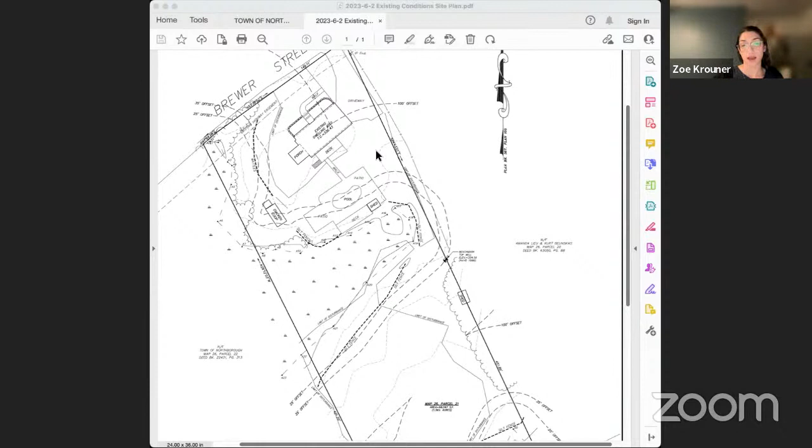To summarize, the homeowner has been on top of this issue. We plan to submit a remediation plan with an NOI as soon as possible. The homeowner is very sorry for what happened, and we would just love to get some feedback from the commission to come to a resolution. Thank you.

Okay, thanks, Zoe. Whitney, what are your thoughts? Start with you.

Well, my first thought is that I don't know that we want to let him keep the patio there, since I don't think we would have given them permission to do it in the first place. The commission's got to consider the idea that it's within the 25-foot zone.

It was a garden. There was some vegetation there. So I don't know that we need to make it return back to just a wild 25-foot no alteration or no disturb zone. But having a slab in there and then the fill, I was hoping we'd get more of a restoration plan for the areas that were filled, the soil and fill near the patio, as well as the filling associated with the area farther south across the wetlands where the big brush pile was.

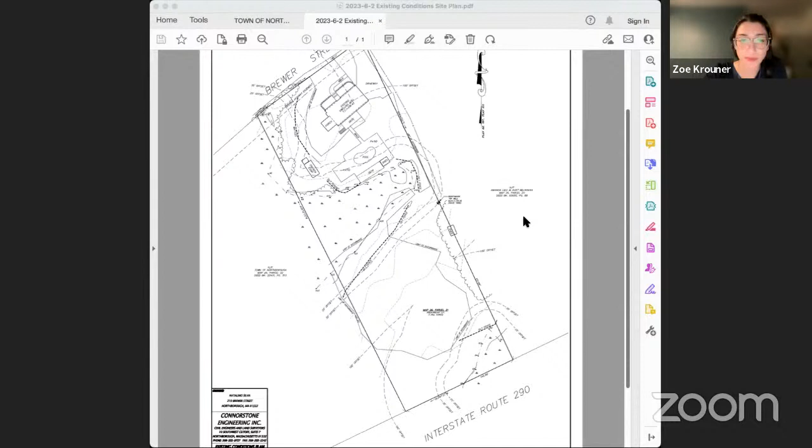You put a worm on the hook and threw it in the pond, you got some bites here, right? So you got some input to think about and put a plan together. But I think you see where the commission's coming from for the most part. For sure, yeah. Yep, that would be good.

I apologize, I just had to step away, but when I hear the idea of a conservation restriction on that back property, I don't see the sense in doing that. I think the commission is not really getting anything out of that. The property owner can let it revegetate and do whatever he wants to do on there to maintain it, but I'm not sure what the benefit is to the Conservation Commission. We're going to have to keep an eye on it, monitor the restriction. I would like to see more of the wetland restoration work in the area that's in that middle wetland, pulling out that brush, maybe enlarging that, digging into that hill a little to make the 2-to-1 restoration on the wetland that's connected to the area where the fill was placed around the patio, and not just have it all in that back corner where it isn't really associated with the area where the fill was put in.

Would you actually remind me, repeat that for me? The last part. The area down to the left, right where your arrow is pointing, the limit of disturbance, it looked like the brush was in a more pointed orientation as opposed to that broad, flatter area parallel to the wetland edge.

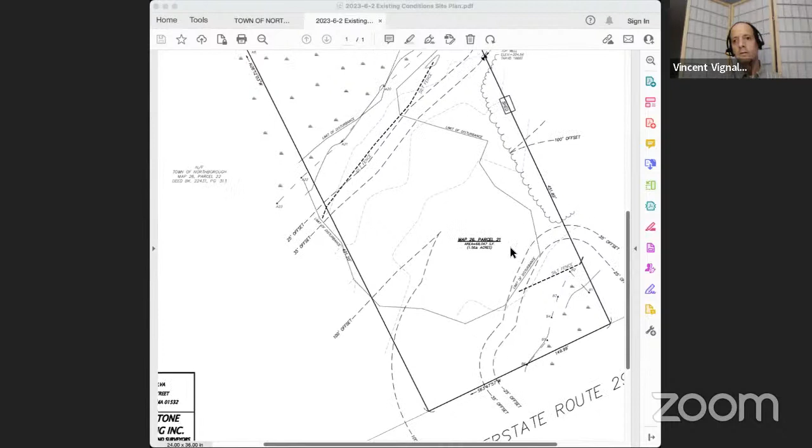So it looked like it was dumped into more of a pile that went farther out. I would want to find the edge of the wetland there and restore the area underneath the pile that was taken out, and possibly do any regrading needed in that area to the south. If restoration is needed, it should happen where the dumping occurred, not in an isolated area out in the back.

I would still keep the 25-foot no disturbance areas. I think he's going to need access on the east side, the east property line, where that erosion control line is. He's going to need some access to get through there, but that would have to be limited, with permanent signs, maybe a fence installed, so we don't get any more encroachment there, and bring a fence or real barrier all the way around to the chicken coop so we don't get further encroachments.

I'm looking for it, yeah, something around there.

Okay, Zoe, do you think you're going to file next month? You're going to be ready for July or not? We're hoping so. I'm getting questions and comments from the owner saying he wants to get his pool opened up for the summer and wants to put a fence up. I've told him we need to have a plan submitted before he can do anything out there within 100 feet. So he's been saying he's waiting for you. So you're getting it on both ends here.

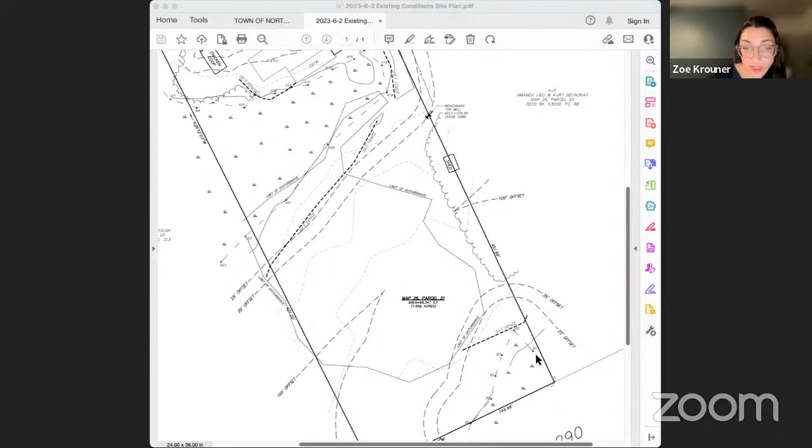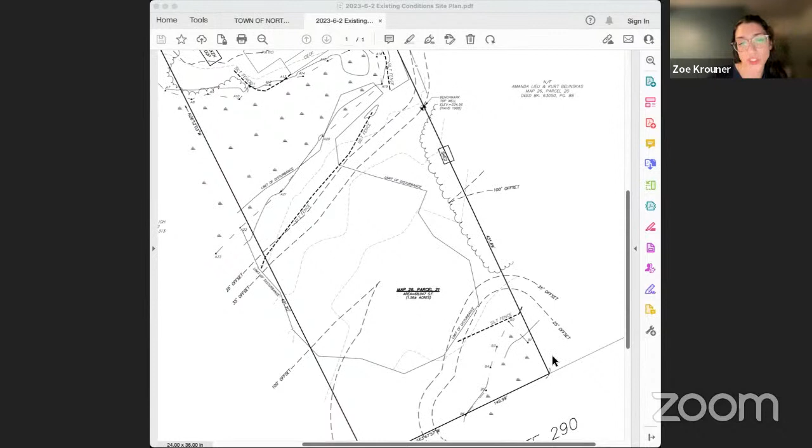Does that help, Zoe? It does help. I did have one question regarding this area over here. There are some clippings in this area that the homeowner said the neighbors were throwing over, and he's happy to remove it. Will the commission be looking for a restoration plan in this area as well, or just to remove what's there now? I would say you've filled wetland, you need to restore it. I'm not sure, it's up to the commission what they think, but it seems pretty cut and clear.

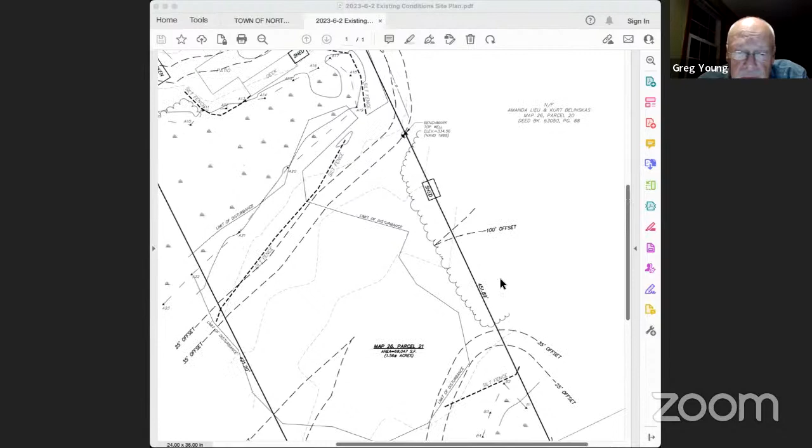Clean it out and bring it back to what it was. All right, well, thank you everyone so much. This was definitely helpful, I really appreciate it. Thank you, Zoe, thank you.

All right, what else, Vinny? We have another guarded person here, Natalie M. We still have her on something, I just can't remember. Do you know what that one's for, Zoe, for Natalie? I thought she was watching for bridle path that happened earlier. She might just still be lingering. Okay, that's fine, then we'll move on.